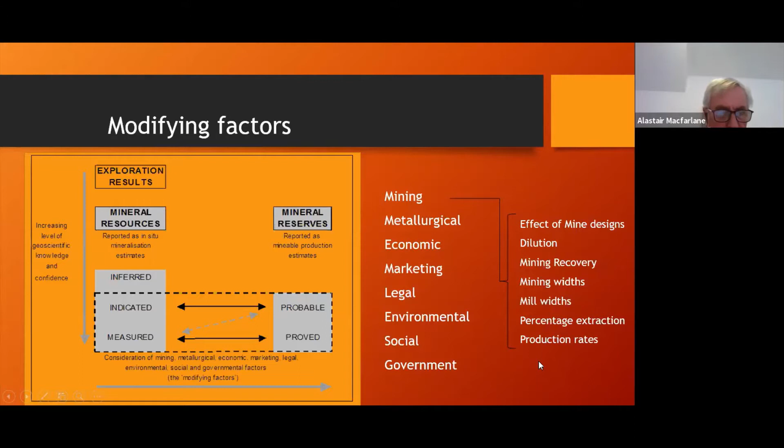From a survey point of view, we go back to looking at our different widths, typically in our tabular mining environment, where stoping talks to us about channel widths, which is the width of the reef we're looking at, then our stoping width, our broken width of what we actually take out, converted then into a tramming width with the addition of fall of ground material, and also ore pass scaling and that sort of thing, through to a hoisting width, and finally to a milling width. So we'll have some increase from a channel width of 50 centimeters, perhaps up to 180 centimeters on milling width, when we bring in all of this dilution that occurs along the process.

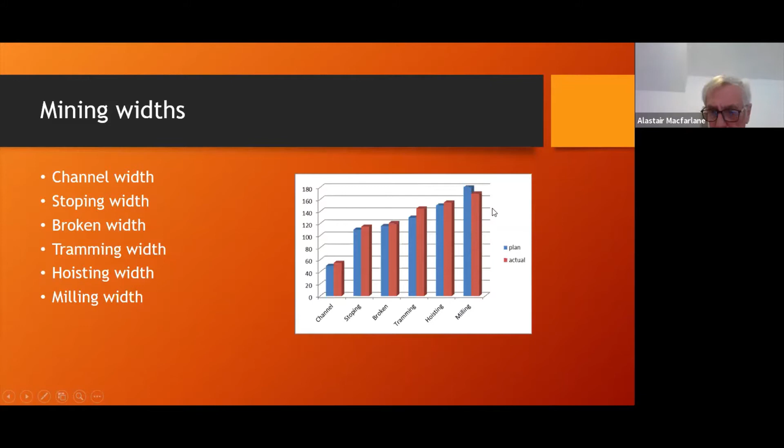We'll be looking at that as a plan and an actual, and in survey terms, the difference between the plan and the actual would be a discrepancy, either positive or negative discrepancy. In this case, a negative discrepancy.

So dilution is contamination of ore with barren waste wall rock, typically, or it may be contamination of ore with material below the cutoff grade. Therefore, we need to know where the cutoff grade is in order to classify that material either as ore or as waste. Or as marginal material. It could also be contamination of ore with recovery reducing minerals, especially in the base metal environment, or even in the PGM environment, where excess chrome could be reducing our downstream recoveries.

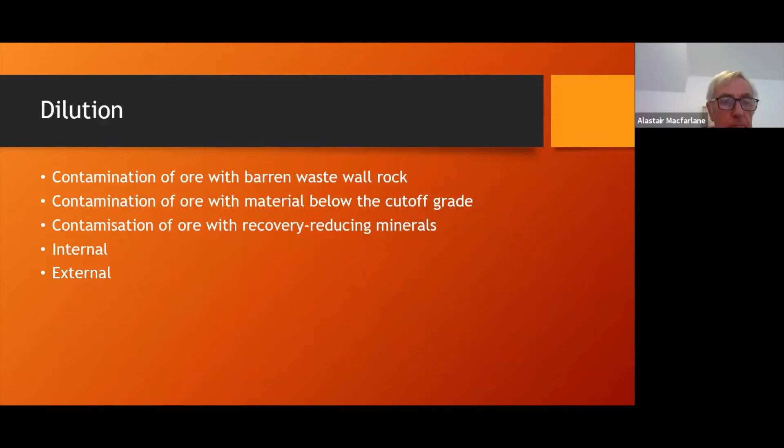Although we may be able to separate it out and sell it as a saleable product, if it's reducing recovery downstream, then it's diluting material. And dilution can be internal or external.

So here are some definitions. Dilution is the tons of waste compared to the tons of ore. Sometimes you see it expressed as tons of waste compared to tons of ore plus waste, but that's not correct, because that tends to underestimate the dilution. So it's a percentage of units of dilution compared to units of ore. Primary dilution is inherent in the mining method selected, whereas secondary is dilution incurred beyond the planned stope dimensions. So total dilution is primary plus secondary.

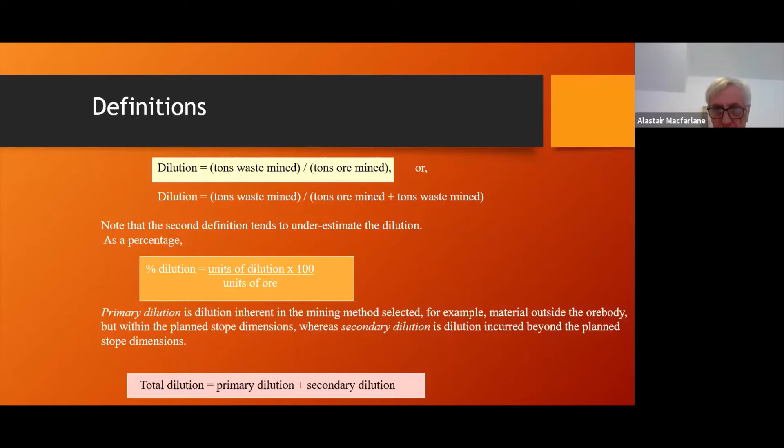Starting off with a tabular environment, if we have a look at potential dilution that's coming in through mining, through fault losses, dikes and faults, bringing in overbreak, things like that, off reef down here, how much we're pulling in from in-stope excavations.

There's an interesting question down there: what is the effect on mine call factor? There was one operation that I looked at fairly recently that had a pretty poor mine call factor, and it was quite clear in that particular case, because of an extremely high propensity of this kind of thing, that the main cause of the mine call factor there was underestimation of this kind of off-reef contamination in the ore flow. But that's only for that particular operation.

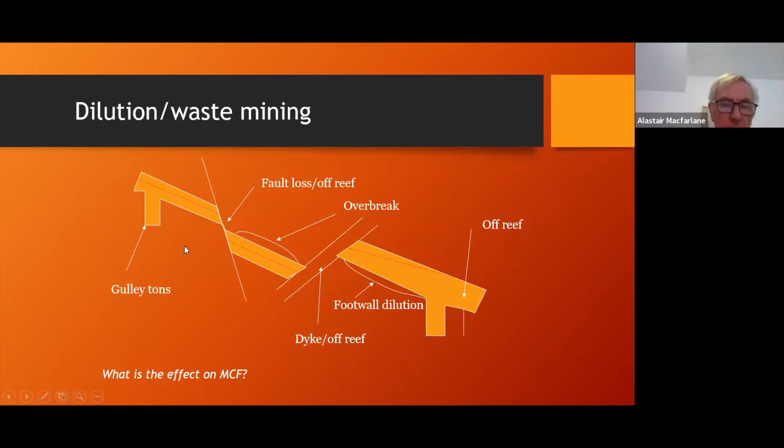We also looked at others where the opposite was true, where we found that the amount of dilution from this kind of thing was already accounted for. So it's really a case-by-case situation.

Again, in a tabular environment, we have planned stope dimensions for a channel width and a mining width to accommodate people to go in there to drill and blast. Obviously we want that to be minimal, but we may get unplanned footwall dilution here, especially where we've got soft footwall, where we may be pulling out things like Booysens shale in the footwall. We may have damage to the hanging wall, bringing in waste from the hanging wall beyond the planned dimension, maybe a bit of underbreak over here, and then internal dilution as well, which would relate to split reef.

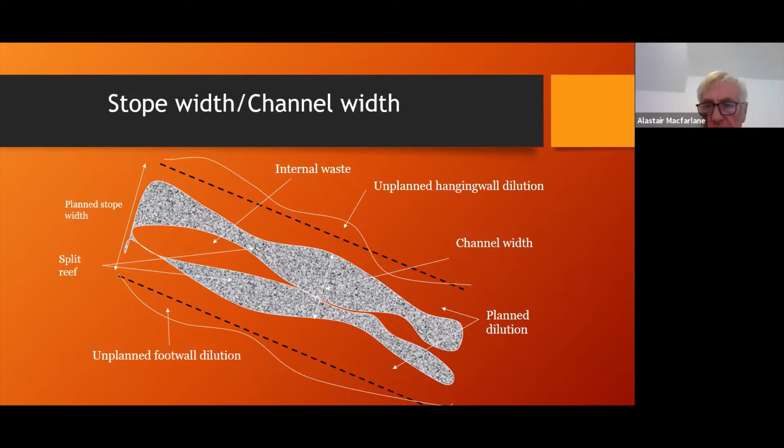I'm aware of a couple of operations at the moment that are battling with split reef, where this material is causing significant dilution, and attempts are made to do things like waste packing and separation. But from a more advanced technology point of view, one could be looking at things like ore sorting technologies, which have advanced quite well in recent years.

So dilution sources in tabular mining during stoping will typically come from overcharging, over drilling, inaccurate drilling, good old-fashioned stuff that we've tried over many years to overcome with better explosives, with also drill rigs and other kind of technology that can help us there. Falls of ground, impacts of seismicity, scaling in ore passes and other excavations, and cross-tramming.

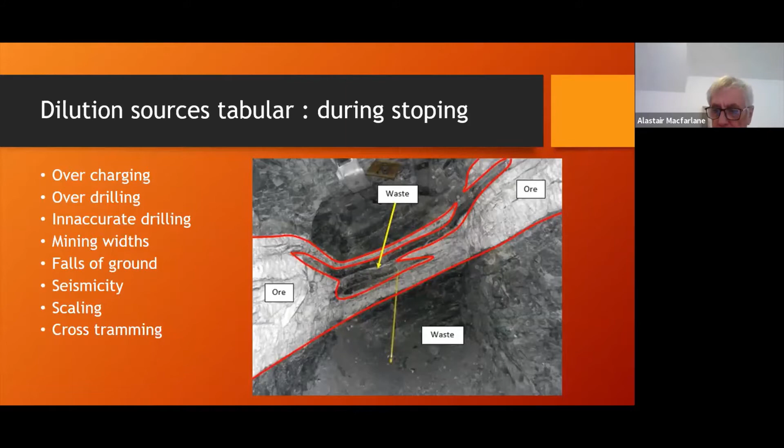Then after stoping, stope hanging wall failure, like we see here, where there's our channel width or our reef or our planned stope width. This is a typical backbreak situation in a PGM environment, where all this material, which is falling down there, will either result in abandoning of the ore that's underneath it, or pulling out very significant dilution. So we can get ore loss as a result.

Maybe ore pass failure occurs as well. Watch out for belt changeovers, because we may get waste being hoisted or put into the plant, or vice versa, reef going on the waste dump. Main ore pass scaling in deep operations, and surface cross-tramming as well. So these are just some of the impacts that we'll get.

So fractal analysis and survey measurements should be able to provide calibration for us for these forms of dilution. Accurate measurement and data capture and data analysis is more possible these days, and we need to utilize it in order to calibrate our ore body to be able to put the right factors into our planning.

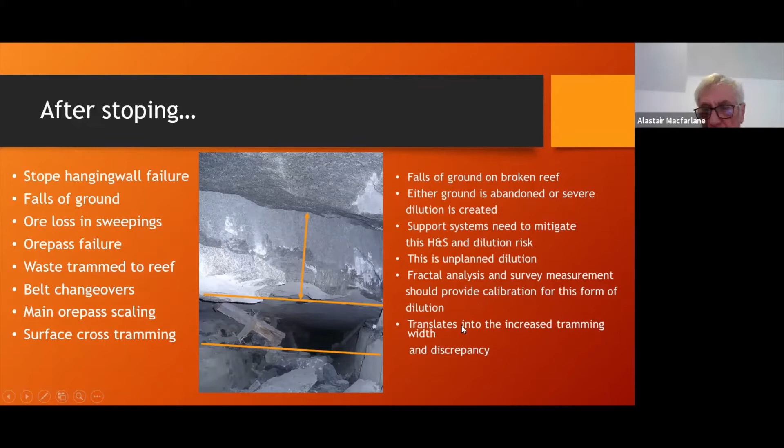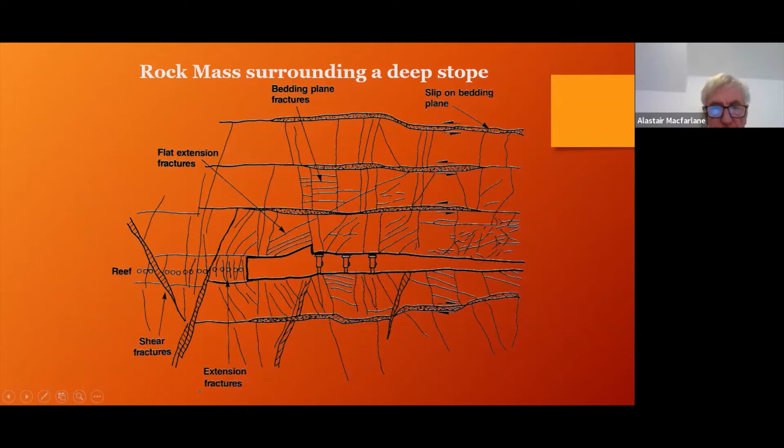Typically in that environment, very highly fractured ground can result in a lot of dilution coming out that is unplanned from our planning model. So let's move away from there into massive stopes.

Starting with sub-level open stoping, we can get dilution coming in from sidewall failure if the dimension outside our planned stope is into waste. We could get sloughage happening on both sides. From blasting, we can get damage caused there, drawing in waste by over-drilling, vibration and overcharging.

We might have internal dilution such as this reporting down to the draw point, because in this kind of environment we cannot be selective, so whatever is in there is going to come and report through to the draw point.

We also get time-dependent failure here. If we're mining this kind of stope on a retreat, time-dependent failure will also result in sloughing of sidewall reporting to the draw point where we may still be drawing.

Poor sampling can also impact this if we don't understand well enough where our ore boundaries are, along with over-drilling, inaccurate drilling, overcharging of large blasts creating vibration, and poor geological and geotechnical models, the accuracy of which depends on the quality of the delineation drilling we are doing underground.

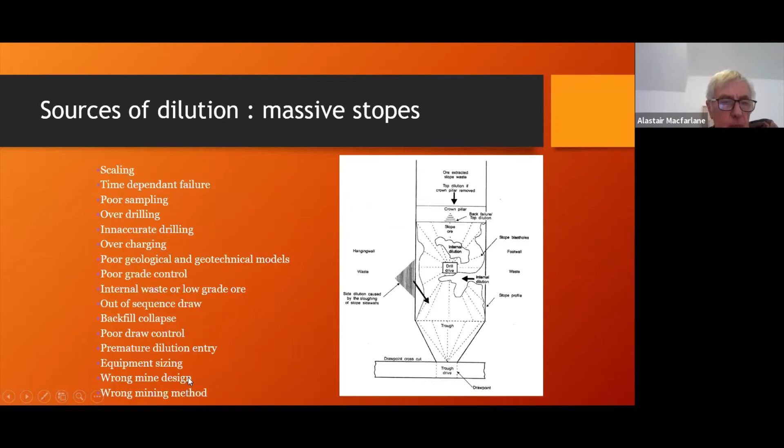Sometimes equipment sizing is an issue, looking at equipment that is too big, where we have to make larger excavations to accommodate the machine. That is not good, and maybe the wrong mine design and wrong mining method altogether.

Clearly on the drilling side of things, this is more prevalent in narrower ore bodies. If we're looking at the copper belt, typically in Zambian operations, the larger operations there would have been mining very large ore bodies where dilution is not a significant issue.

Whereas the narrower the ore body becomes, as has been the case with a number of newer operations up there, dilution becomes much more critical, because 10% dilution at the edge of stopes on a 150 meter wide ore body is fairly insignificant. But if the ore body comes down to a 5 meter width, 10% dilution on that becomes highly significant.

And this would be exacerbated if the ore body boundaries are irregular like this, and we're getting blast vibration. We have weak sidewalls here, a hanging wall and footwall, then we have over-drilling. We can get more and more dilution reporting down to the draw point.

The one particular example we were looking at was about a 4 meter wide ore body with ring drilling like this. The ore itself, as well as the sidewalls, were weak to the extent that after drilling the holes, sometimes the holes were closing up because of the highly fractured nature of the ground before we could get the explosives in. It was a different challenge.

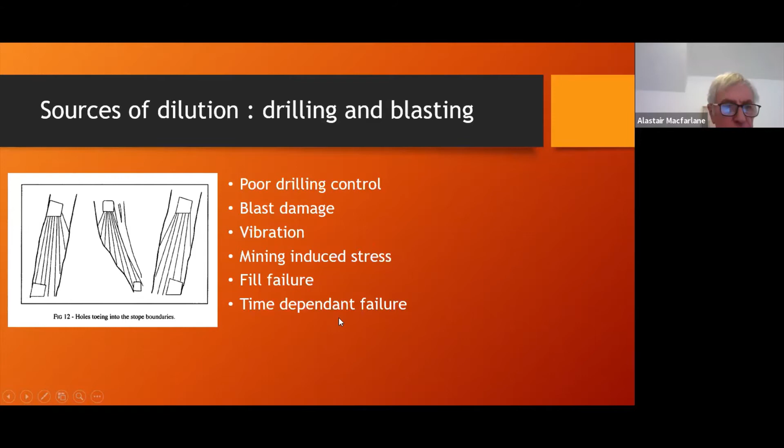We could be getting dilution in terms of mining-induced stress and fill failure, like I said before, and the time-dependent failure effect also. So here we are, thin ore body, vertical ore body in an open stope. That's our planned ore to come out there, and you can see here you've had severe sloughing happening on both hanging wall and footwall, probably resulting in a good 100% dilution if you just look at the dimensions there.

And this is time-dependent failure. This will all report down to the draw point and cause dilution. So we need to get the broken ore out as quickly as possible before this time-dependent failure happens.

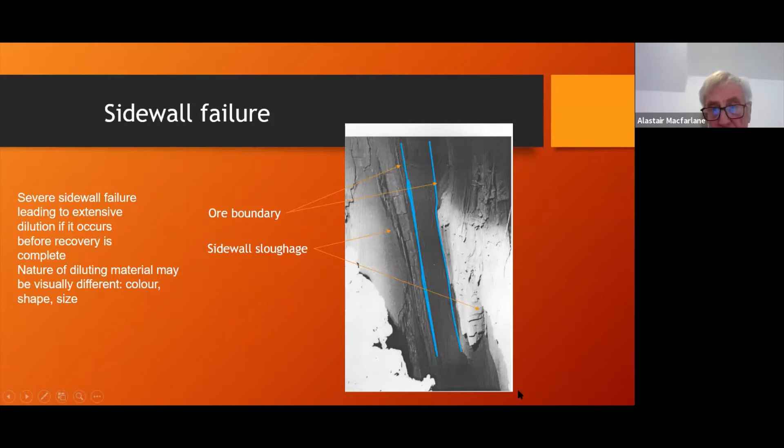When it does report, you would see here the material that we are blasting, if our blast pattern is right. Apart from the different coloration of ore compared to waste, the fragmentation is different in terms of what's reporting down there. So this kind of sloughage, when it reports to the draw point, ought to be quite clear to the operators or supervisors. But if you're chasing tons, they may be blind to that.

Here's a very complex ore body we had a look at, where they had a severe problem with mine call factor. On this particular sub-level, you can see the ore body in red. This is a plan, and delineation drilling has been done to try and identify the ore boundaries. But this is extremely irregular, with massive dilution happening here.

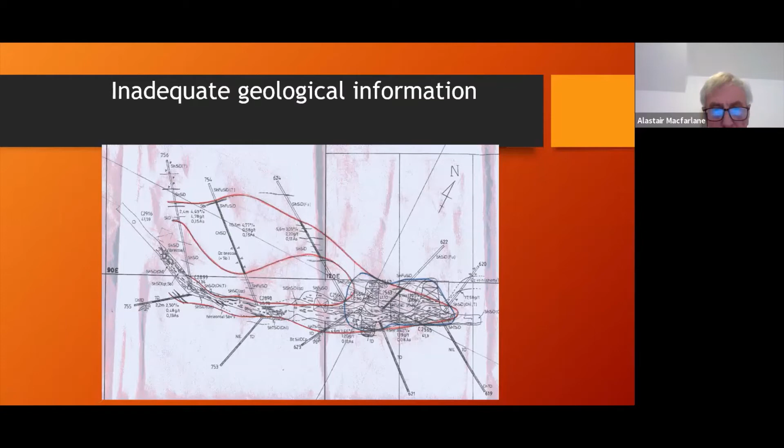To try and mitigate against that, these sub-levels in this sub-level open stoping operation were minimized to only 8 meters separation vertically, and on the subvertical, to try and overcome or minimize the effect of the extremely irregular ore body.

Here you can see an overhand layout for this ore body, and the secret here is to get the ore out before the time-dependent failure happens. In this particular case, they were not doing that - they'd gotten severely out of sequence down here. So there was massive dilution reporting to the draw points, resulting in a severe drop in recovered grade.

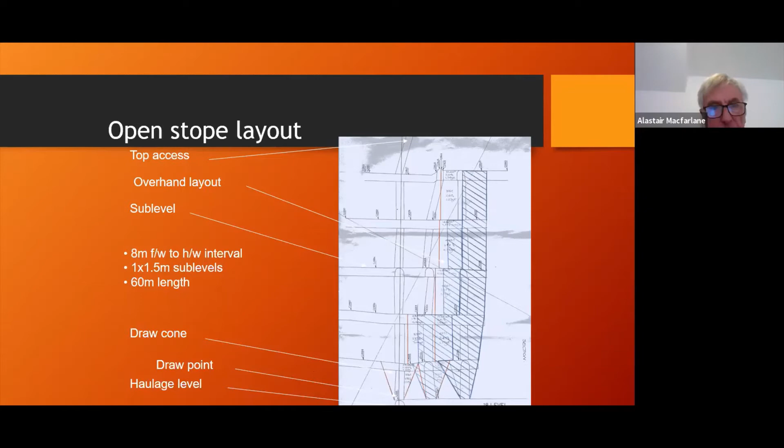So we look at the block cave situation. We are looking at either low-grade material reporting that is actually inside, because we can't be selective here at all - maybe low-grade material within the pipe, or different facies of low-grade material. Dykes and sills that may fail, like was the case at Cullinan, the Gabbro sill that was intended to stay in place but eventually failed.

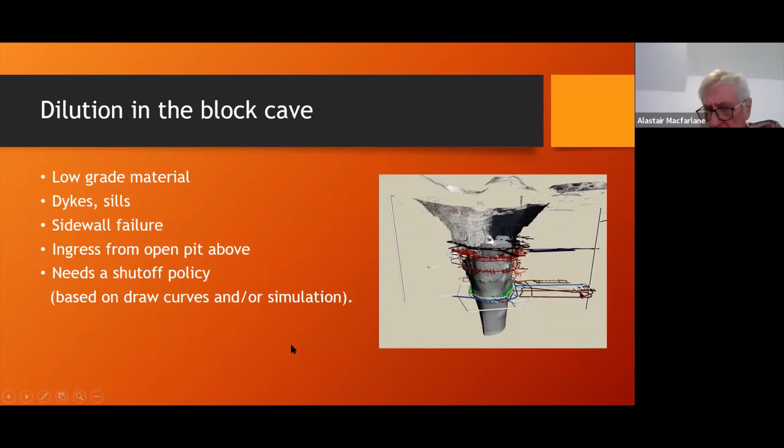Sidewall failure occurring either in the block itself, or sidewall failure from the open pit above, reporting down onto the top of the block. For this kind of thing, we need to have a shut-off grade policy at the draw points on the production level, and that needs to be based on draw curves, which we'll talk about later, or on simulation of the draw.

In the sub-level caving operation, we've got caving material. We're mining on the retreat here, uphole ring drilling, multiple sub-levels. In years gone by, typically we would have had isolated draw - working on one level, trying to pull ore out from one or two draw points or sub-levels. The result would have been pretty high rates of dilution reporting in there, maybe 20, 30, 40% dilution.

These days, what we work with is interactive draw. So we work multiple sub-levels at the same time, both in the vertical dimension and in the strike direction, so that effectively we have a moving curtain of ore all the time across multiple draw points. We also rely on the fragmentation here, because fine material runs faster than coarse material. So we blast the ore to fine portions, and we make sure we're pulling that out as quickly as possible, so it comes through before the waste reports. With multiple draw points, we have effectively a moving curtain through there.

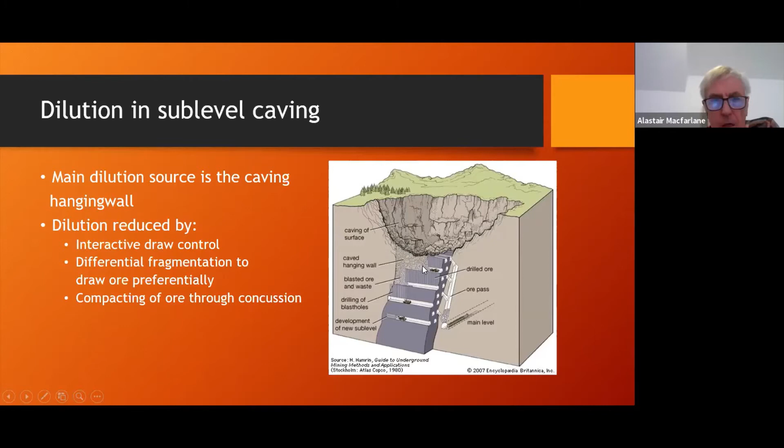In the open pit, if our ore boundary is irregular and not quite matched to our bench profiles, then that will draw in dilution.

We may, of course, as well have internal dilution. And then we also need to look at blast movement, whether it be waste, which can cause spillover on our benches onto our ore floors, or movement of the ore itself. So we need to be able to model that, and that we can do.

We can put in markers to check out on that ore movement as well, so that we had an original dig plan, which was looking something like that. By the time we blasted, the ore has moved, and we can go back and recalibrate that dig plan in order to make sure that we're going to get minimum dilution and minimum ore loss once we start loading.

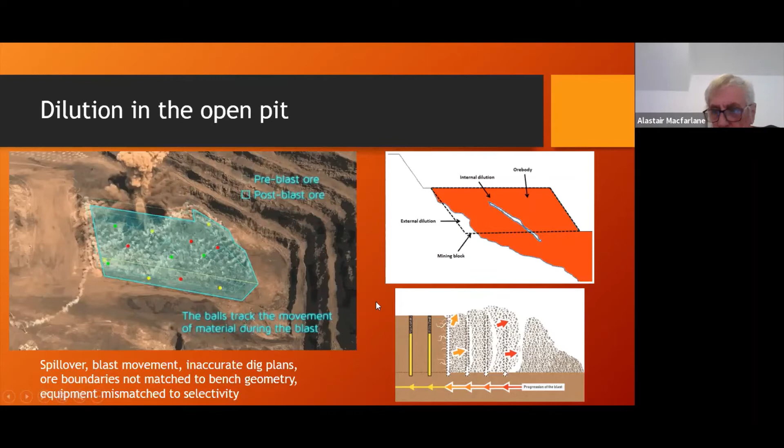Also, we need to look at selectivity. It's important to say if we want to increase selectivity, for example cutting those benches into half size for better control on dilution, then you've got to ask the question: is the equipment we've got matched to the level of selectivity we want to apply? That often precludes you from doing that, because you don't want to replace your whole fleet. There's a bit of a trade-off involved there.

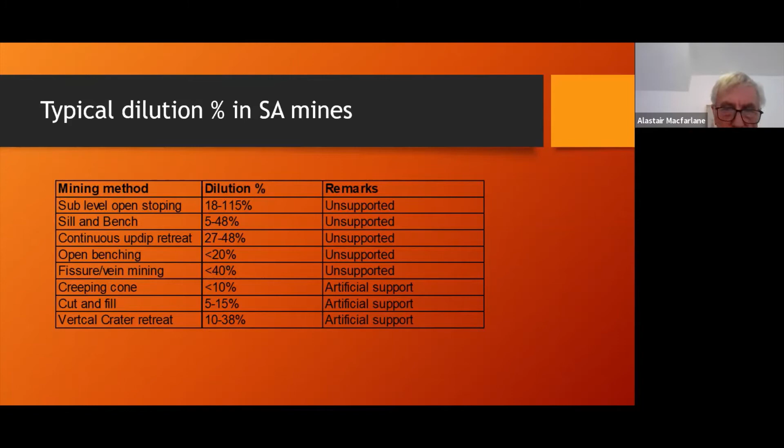Here are some typical percentages of dilution for different mining methods in South African mines, between unsupported methods like sub-level open stoping and benching, compared to where artificial support is used, specifically applied for dilution control, like in cut and fill operations. Here are some international comparisons that have been done. Sub-level caving shows, in these cases, 10 to 30%, 10 to 15, or 20 to 25%, where these days we can reduce that below those numbers.

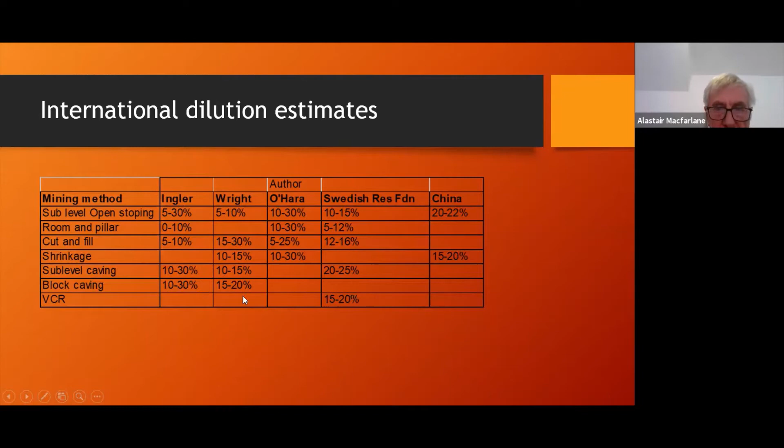This is an example from the Golden Giant gold mine in Canada, where they've done stope calibration and back analysis. Here are different stopes in a sub-level open stoping environment with backfill or post-backfill, along with the planned tons to come out of the stopes and the actual mined tons. These actual mined tons are taken from draw point tons measured, as well as cavity monitoring done afterwards. For example, this stope was planned at 60,000 tons but actually drew 104,000 tons, so a lot of hanging wall waste failure happened in that one, which came from the cavity monitoring that identified it.

On another one here, the tonnage drawn was a little more than planned, but there was 13,000 tons of backfill that came out of that draw point. So here you see the draw point dilution: 34% in one case, 70% in another. This information is useful to you.

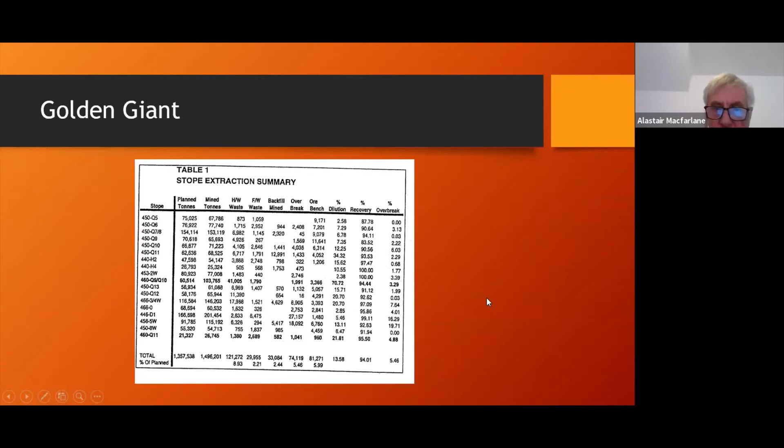It's historic, obviously, you can't change that. But depending on the geozone you're in, you can say let's redesign, because clearly something was wrong in this case with our design. Let's go back and have a look at that. Our stope dimensions must not be correct, something has changed, something has gone wrong. Let's make sure we take account of that, whether it's 20% or 34%, figure out what went wrong, and incorporate that into future designs.

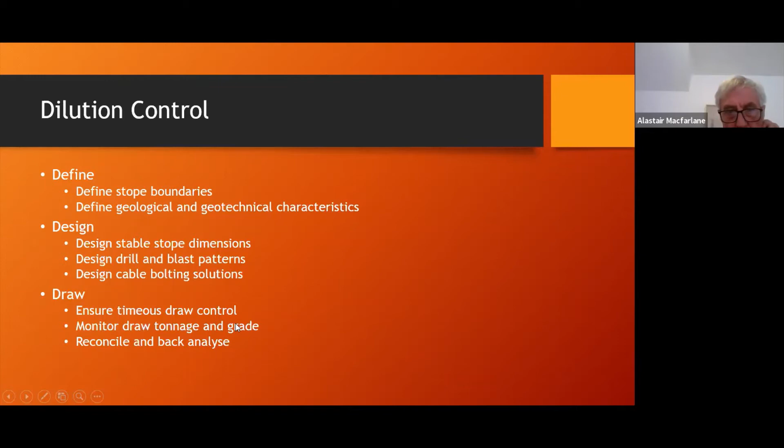So when we talk about dilution control, we talk about define, design, and draw. Defining is making sure we define our stope boundaries and our geological and geotechnical characteristics - that's all about data, modeling, and surfaces. Design is looking at designing stable stope dimensions, drill and blast patterns, cable bolting, and other support solutions. And draw is ensuring timely draw control, monitoring our draw tonnage and grade in real time, and reconciling and back analyzing all the time.

Talking about define: we've done our delineation drilling underground, and we need to make sure the data we're getting is sufficient in terms of the end point spacing of our fans of delineation drilling, so that we get good ore boundary definition to use for stope design. We need to define our data requirements - what data do we need? Obviously we want grade, but we also want structure, boundaries, and geotechnical characteristics.

These characteristics are what we use for defining mining rock mass ratings. We look at intact rock strength, rock quality designation, joint spacing, fracture frequency per meter, and joint condition, and we have ratings for each one. We can choose to use rock quality designation and joint spacing, or just use fracture frequency per meter. This comes from physical observation and measurement, and these are ratings we add together to get a rock mass rating or rock mass strength. Then we put in adjustments for weathering, orientation of the stope, induced stresses, and blasting effects to give us a mining rock mass rating, which we'll see used a little later on.

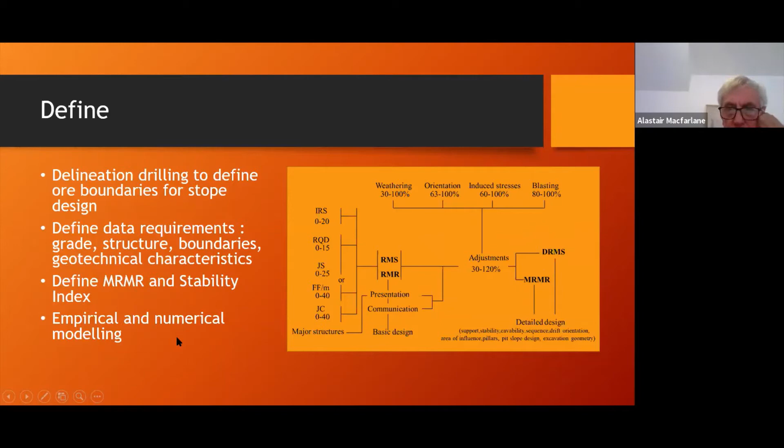So when we do stope design, first thing is mining method selection, maybe a bunch of trade-off studies we need to do, saying what are the expected dilutions that we're going to get, and depending on mining method and stope dimension, what's the level of selectivity we can apply, what's the ore loss likely to be, and obviously cost of it.

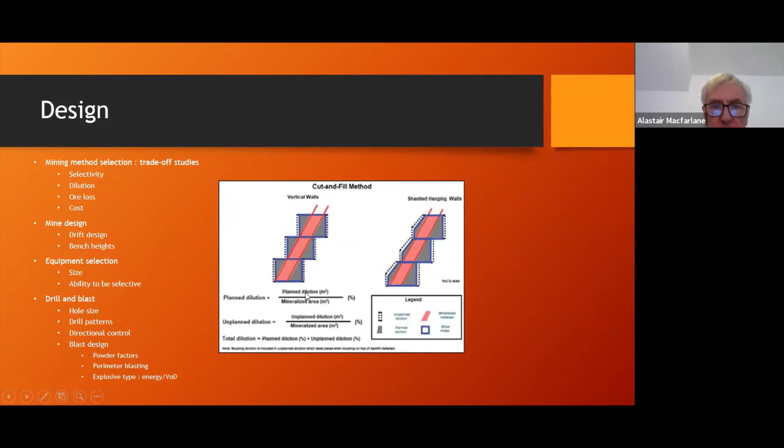Mine design, we look at our drift design and our bench heights. In this case here, we've got a comparison for cut and fill methods using standard drift development for drift and fill. And we can modify that - this is a fairly narrow ore body, so we can modify that by going to a shanty back system, modifying the shape to try and reduce the planned dilution here. Here are the outlines that we get, so that would bring in the unplanned dilution as well.

Equipment selection, we need to look at size and our ability to be selective again, and then drill and blast design for the correct hole size, powder factors, drill patterns, directional control, and our blast design in terms of whether we need perimeter blasting, explosive type, velocity of detonation, energy, etc.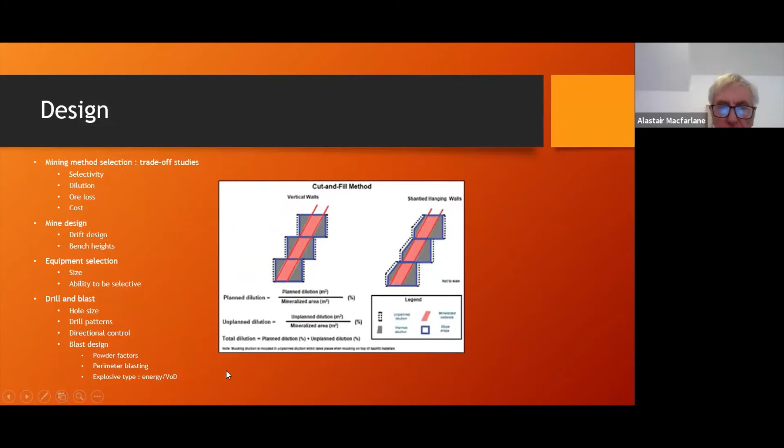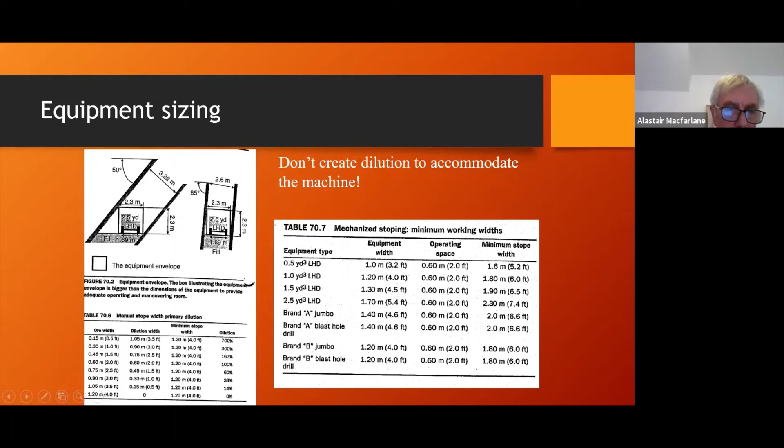Equipment sizing - what we don't want to do is create dilution to accommodate the machine. So get the right size machine to do the job and not have to make a big excavation to accommodate it. This shows for different ore widths the sort of dilution that we're going to bring in, where we've got a minimum stope width needed for the equipment. We see the dilution coming from 700% down to 0% at the bottom. Also for mechanized stoping, the minimum working widths needed for different machines - an important mining engineering consideration to get the right machines.

So we look at the modified stability graph method for dilution prediction. Rock mass rating - we looked at mining rock mass rating before. If we look at rock mass rating, Bienewski tells us this is how we can characterize or derive rock mass rating.

Where Q in this expression is the tunneling index number, and Q is defined like this. So we can calculate Q when we know these parameters that we can apply, and that Q number comes into our modified stability graph calculation, where the stability number N is modified tunneling index times 3 factors: A, B, and C - one being a stress factor, second being a joint orientation factor, and the third being a gravity factor.

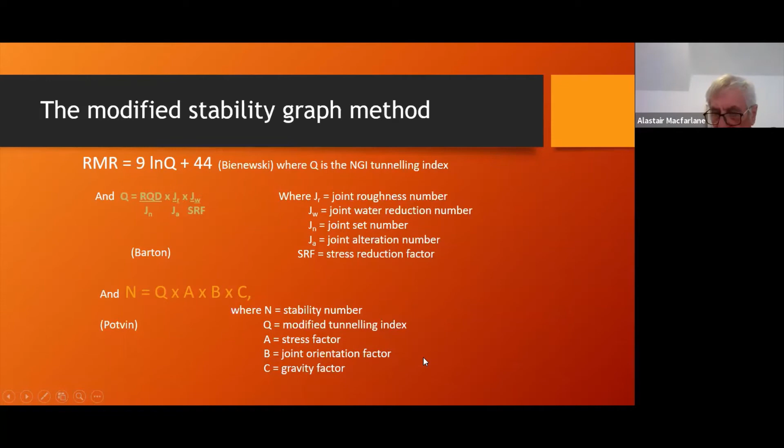And this was developed by Yves Potvin. It comes through into this, where we say here, the modified stability graph, here it is. Primarily, we would use it for defining whether, in terms of designing a stope in a massive mining environment, or any other environment for that matter, is it going to be stable or is it going to be caving?

So we look at this parameter here called hydraulic radius and stability index, where we've calculated it this way. Hydraulic radius is a term used in hydraulics and is a number derived by dividing the area of the excavation in question, whether it be the hanging wall or the plan area, by the perimeter for that particular surface. With that combination, we can see where we plot for a given hydraulic radius.

So what can we change? Well, we can't change the stability index because it is what it is. But the hydraulic radius, we can change - by changing the dimensions and shape of the excavation or the stope surface. So if we want to go into a caving environment, we can modify by moving this way. If we want to go into a stable environment, we go in that direction by changing the shape and plotting up here. So we can do that for basic differentiation, and there's a transition zone in the middle as well.

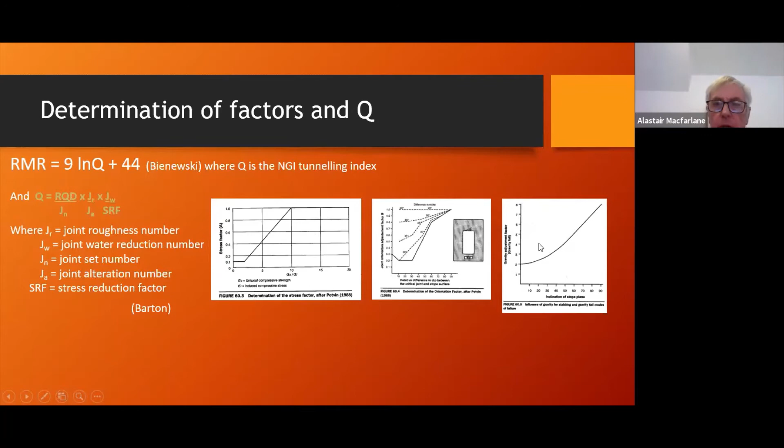And that means that sort of dimension, so we'll look at that in another graph. Before we look at that, here's again what we looked at just now. But here are the three factors: the A factor, the stress factor, the B factor, which is the orientation factor, and the inclination of the stope plane factor over here. So we just read those off from these calibration graphs.

So when we talk equivalent linear sloughage, or equivalent linear overbreak or slough, it is equivalent linear overbreak compared to slough, volume of slough from the stope surface compared to the stope height times the wall strike length. So in reality, the kind of sloughage we'll get will have a profile like that. But what this is doing is it is converting that into a linear dimension across that stope surface.

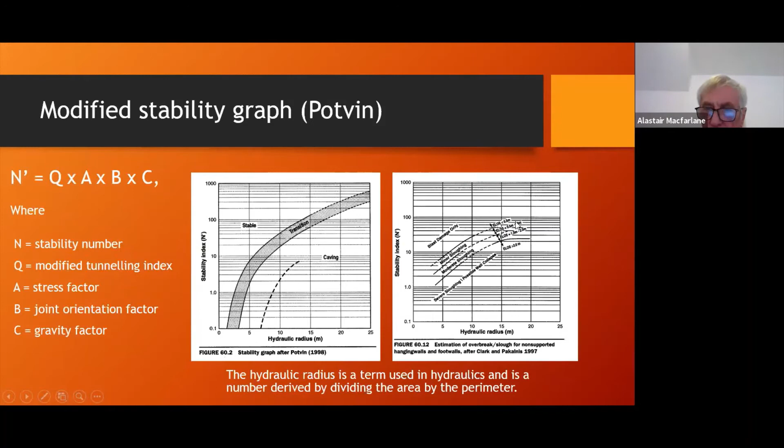And so going back to the graph, that tells us what it's likely to be. Maybe we're in this zone, so saying we're going to get half a meter to a meter of sloughage across that stope surface, and that we can then convert into a dilution percentage, given our stope design.

We can look at this to say, well, let's try and tie this up so that if this is the hanging wall, we want to reduce the amount of dilution coming in, then we can tie it up by putting in cable bolts, a cable bolt pattern, which means we'll have to put in those hanging wall drifts to be able to do that, obviously all at a cost.

And we can have a look here to say, knowing these numbers about rock quality designation and joints and hydraulic radius, we can define for a particular combination of those factors for our ore body or our stope, whichever condition we want, what is the cable bolt density that we require over here. And that's end spacing in terms of cables per square meter. So we can define that pattern for our stope for stability.

As I said, obviously it comes at a cost. So there's a trade-off here. Is it worth doing all of that? Or do we tolerate the dilution? Or do we go to a different mining method? So those are cost-benefit trade-offs that we need to do.

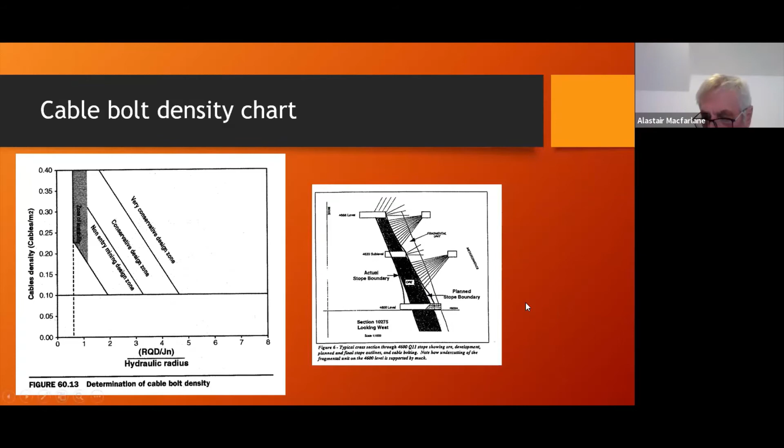When we talk draw, we're going to talk about dilution curves. Here's a dilution curve, courtesy of SRK. So here's the composition of our ore body over here, up to 100%. And here is the material drawn that we're getting at the draw point.

So if we said we're planning 100,000 tons to come out of there, then because that's the tonnage in the block that we're looking at, we would say at 100% draw, this is the point where I'm at, let's use this middle curve. Then I would say what I'm drawing out at that point when I'm at 100%, what is still coming out is 30% ore. So I'm not going to shut off there because I'm going to leave a whole lot of ore behind if I shut off at 100%. So I'm going to draw more than 100%, and I use the calibration curve to do that for me.

And I can actually convert that into grade, and I can use that for grade control as well as dilution control. So I can say I actually want to go to 120% draw because that's where I hit the cutoff grade over there, because I've converted it into a cutoff grade at when I'm drawing 20%. 20% of what's coming out is ore. The remaining 80% is now waste.

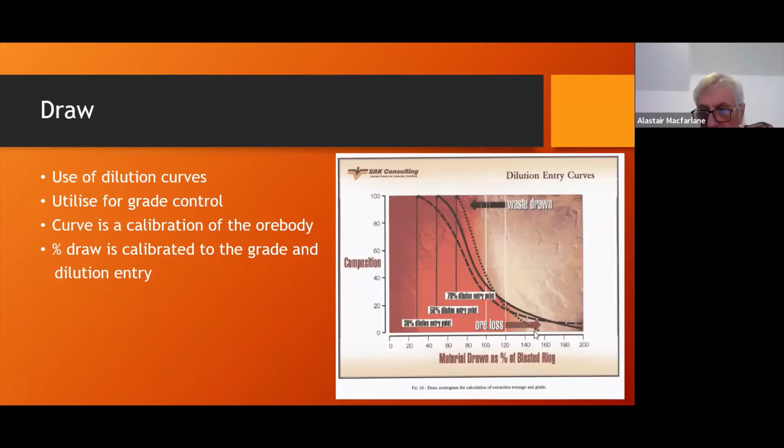When that material's coming down to the draw point, the diluting material may report prematurely if the draw sequence is compromised or if diluting material is finer. It will come down faster and report to the draw point. The diluting material may be visible. The shut-off decision should be taken on the dilution curves or simulations that we're doing. Grade control at the sample points is pretty unreliable, especially if you're getting this kind of stuff coming out at the draw point.

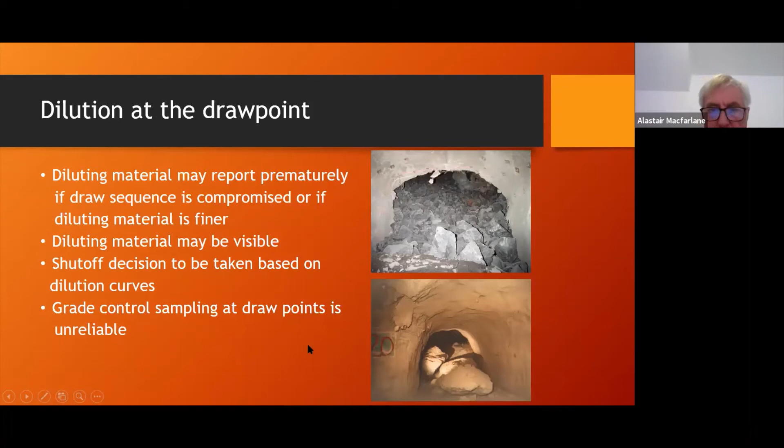So where we're looking at draw, it comes back to the principle of either isolated draw at draw points or interactive draw zones. If we have isolated draw defined by the spacings of the draw points, the size of the draw points and the height of interaction, then what we may get is columns of ore left in the middle that don't report to the draw point, and we get rapid drawdown through the draw ellipse.

And if we've got waste material above here and it's fine, like it would be from the bottom of the open pit, there's a lot of silt and stuff like that, it will race down through and report quickly to the draw point, and we leave ore behind.

Over here, if it's ideal, we get interactive draw. And we're drawing all of these draw points in the right sequence and simultaneously, so effectively we have a curtain of waste that's lying at the top and is moving down at the same rate as we're drawing, so we don't get the premature waste reporting down here.

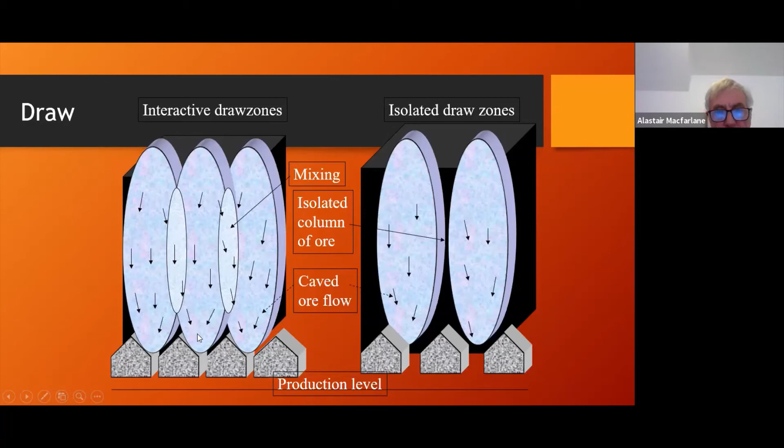If, however, that zone of interaction is too big because we've put these draw points too close together, then we will funnel or rat hole that waste rapidly down through here, and it will report in both directions at the draw points. That's shown here, again, courtesy of De Beers.

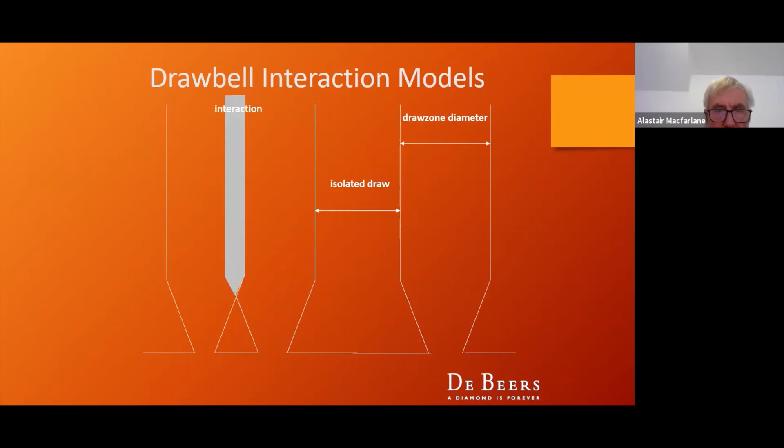Important interactive parameters are the draw zone diameter. We need to know what the interaction is that we need, and the spacings to avoid isolated draw. So we have to put our draw points closer together so that we get the correct level of interaction happening.

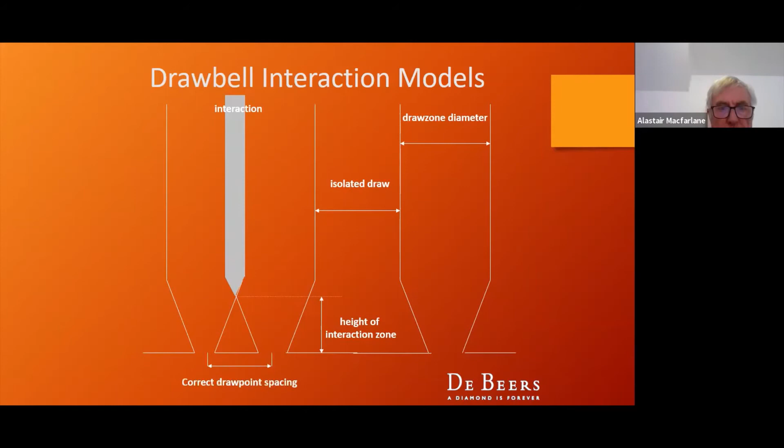Another parameter we need to know is the height of the interaction zone, in order to get the correct draw point spacing to minimize dilution.

And here it is, after another example. We may get ore loss and weight down onto pillars between draw points, which could cause geotechnical problems and draw point failure. And over here, as I said before, too much interaction, and we get dilution reporting very quickly and displacing ore at the draw points.

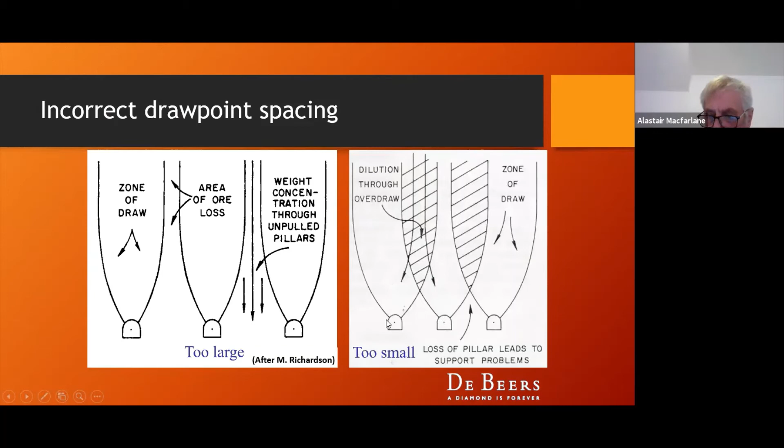We can do a lot of simulation on this sort of thing. As I said, fine material will tend to move down faster, so if that's diluting material, it'll get there faster than the ore. Isolated draw encourages early dilution entry, and we can use empirical design or simulation to define optimal layouts.

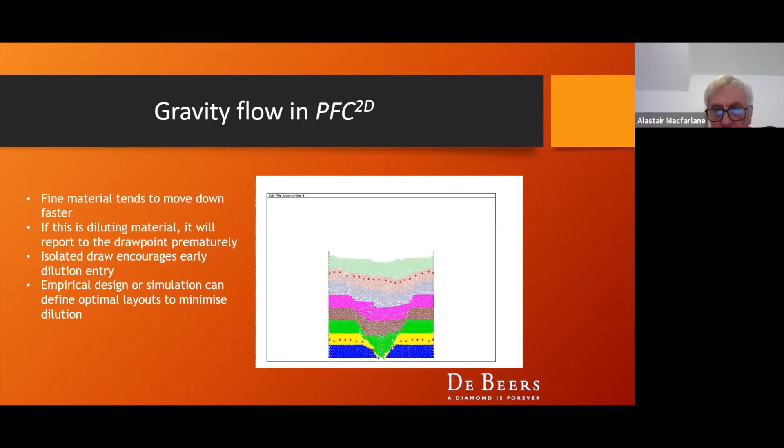This is just looking at a single draw point, but we could obviously simulate multiple draw points. And we've got markers in there that show us, if the waste is on top, how quickly that waste is going to report down to the draw point. And we could simulate that for interactive draw as well.

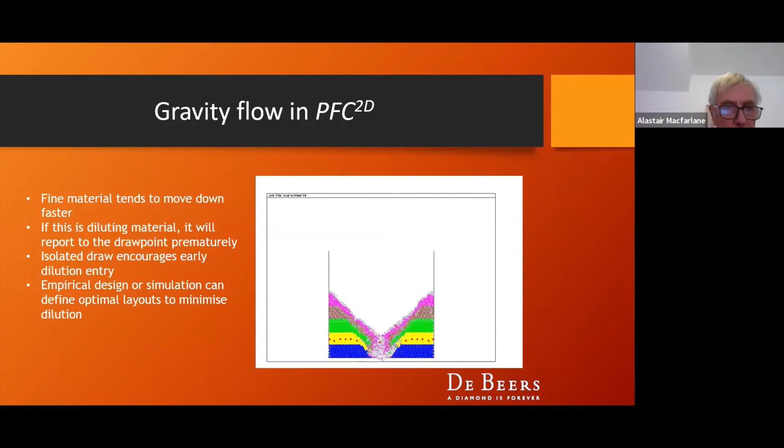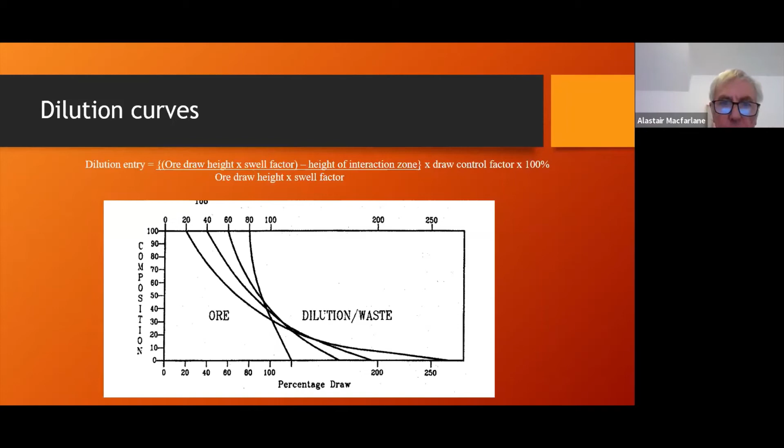As I said, trade-off studies: cut and fill is a higher cost method, but it allows higher selectivity. You can drop the lower grade stuff down into the fill if you want. That relies on a lot of sampling though.

In stope, sub-level open stoping is lower cost but less selective. Cut and fill is designed to reduce dilution in poor mining rock mass rating, hanging wall and footwall conditions. But the cost of the fill and the cyclicity of the operation must offset the higher dilution that you would otherwise get in the sub-level open stope.

Sub-level open stopes can be designed for stability based on mining rock mass rating and hydraulic radius and the stability graph. And of course, for future stopes, you can change the stope designs if you're starting to get higher dilution entry as you go into different geotechnical and mineralized zones.

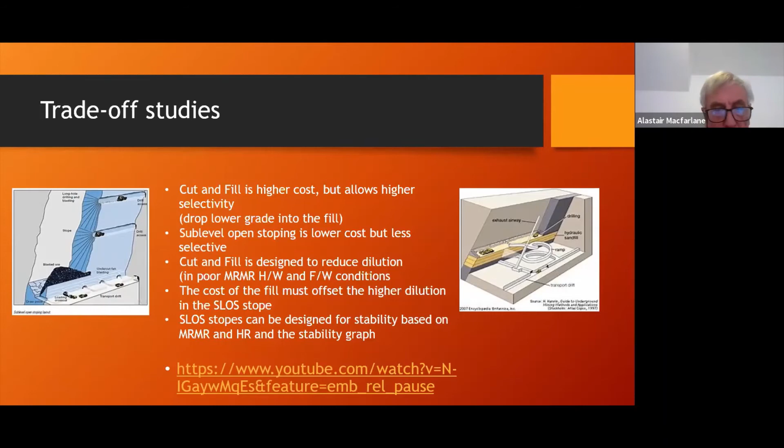Other principles on dilution control would be: try and expose weak walls progressively. Look at your drilling accuracy and shock and vibration minimization. Utilize cable bolting if it's cost effective. Consider pillar designs and look at your extraction sequences.

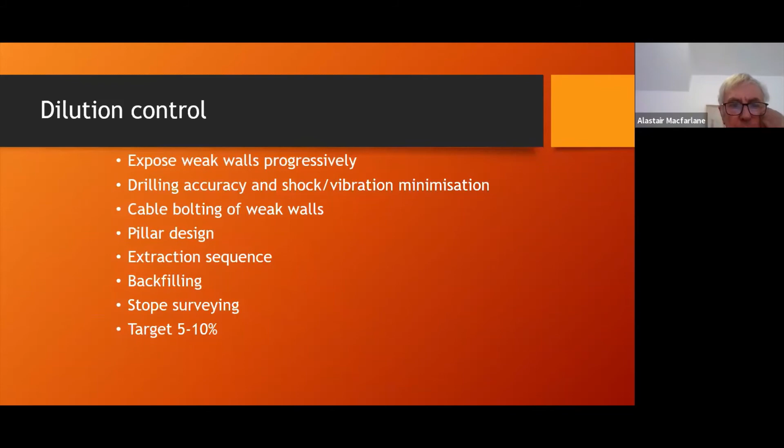Backfilling, stope surveying, cavity monitoring systems to bring yourself down to a target of about 5 to 10%.

What are the effects of dilution? What does it do? Firstly, it messes around your reserve block estimates. If your block estimates are assuming a particular dilution because it's a modifying factor, and you're in fact getting a whole lot more, then your reserve statements are wrong. It skews numbers and results in over-evaluation. It disguises real problems because you might be measuring tonnage and thinking everything's okay, but then you look at your grade and you realize something is not okay.

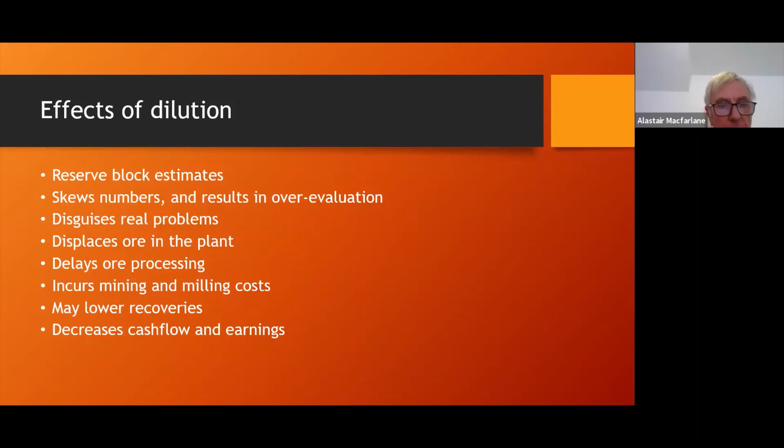It displaces ore in the plant, which is a time value of money issue. It delays ore processing, and it incurs all the full mining and milling costs. And it maybe lowers your recoveries as well, because you're going to have more material reporting out to the slimes dam, and every ton of material that goes out there carries some value with it. And it decreases your cash flow and earnings.

The effect on the cutoff grade - we've got a grade tonnage curve. Increased dilution increases the unit cost of metal production. That will increase your cutoff grade and move this line up, and as a result, your available resource or reserve is reduced. This reduces your payable ore reserve available, and increased dilution decreases the recovered grade. This further increases the cutoff grade. And if this happens unknowingly, then waste is being misclassified as ore.

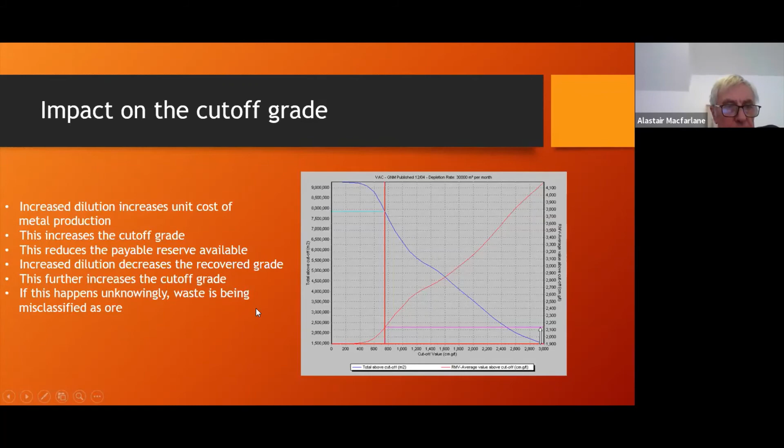If you have a graded deposit, the principle of marginal costing and marginal extraction is quite important, because in an example like this one, if this is your primary ore source, M1, M2 is a secondary source, and both of those are economic - you want to take them out - and you've got M3 as well, which you want to take out. That material grades further into the hanging wall, and so where this may be your original planned stope boundary, you would classify that as waste because it's below your break-even cutoff grade. If you look at an in-stope cutoff grade for a massive mining operation like this, you can actually carry on mining up to there on a marginal cost basis because you paid for all the excavation already with this material. So you could move forward there.

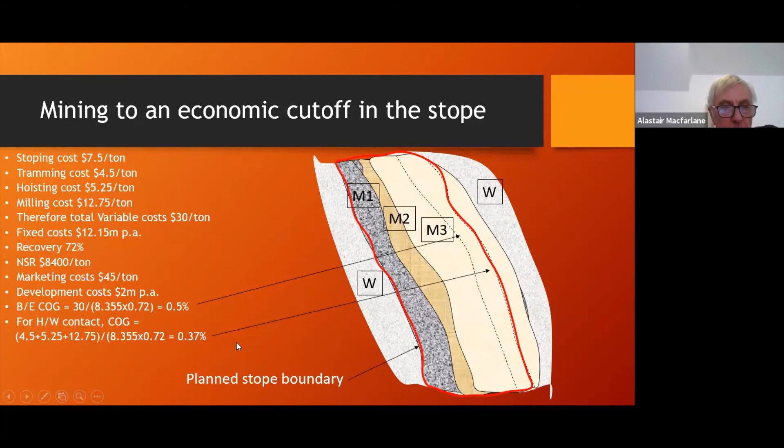So instead of classifying that as waste, it's marginal ore that can come out with this as well, and you can drop down to a lower cutoff grade and still be payable.

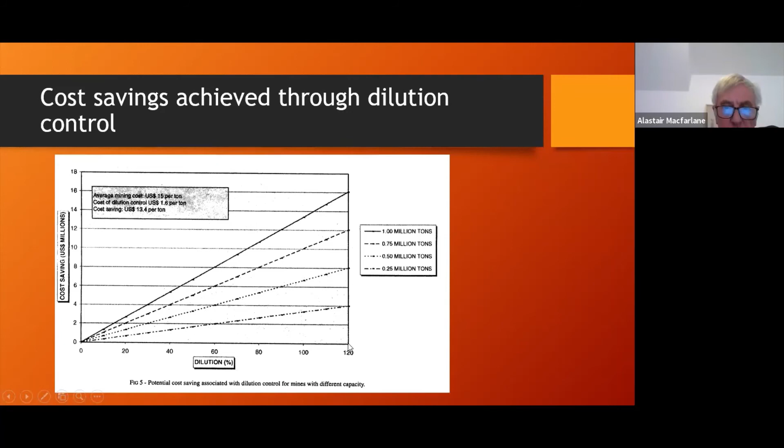This looks at cost savings achieved through dilution control - each graph represents a different capacity. And what you're seeing here is that if you take this line, let's take this line here, 500,000 ton capacity operation, this just shows the cost reduction or cost saving that you can achieve as you move down from 100% dilution down to zero. Quite significant.

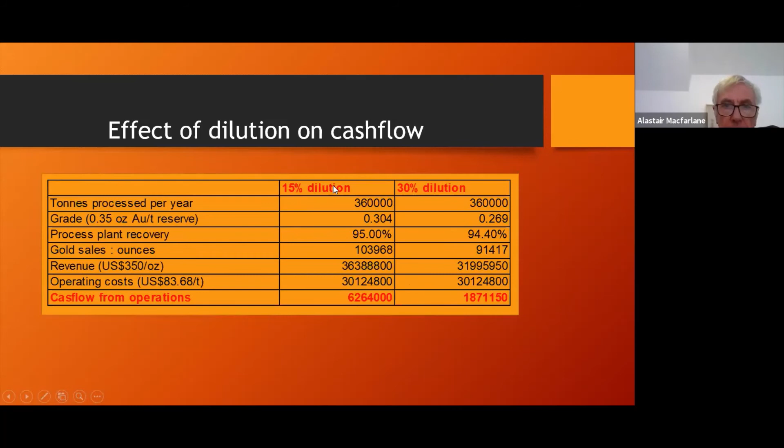And this one I did on a simple model, just saying 15% dilution compared to 30, just on cash flow. What do we get? Grade - drop in grade, obviously recovered. Process plant - slight reduction in process plant recovery. These are your ounces, your revenues, resulting in a two-thirds drop in cash flow annually in going from a 15% dilution to a 30% dilution.

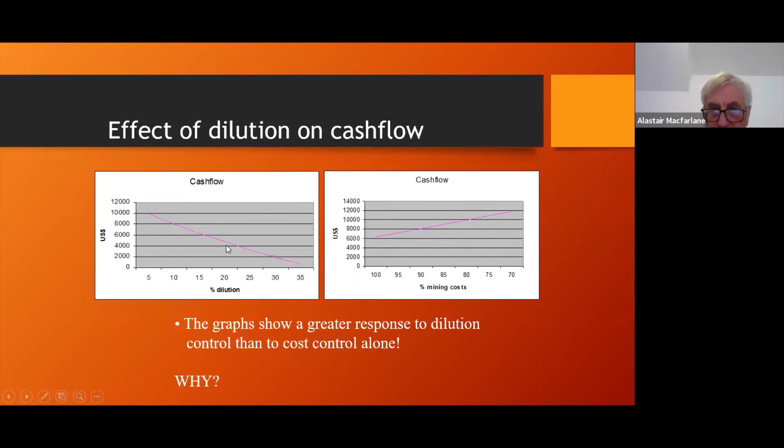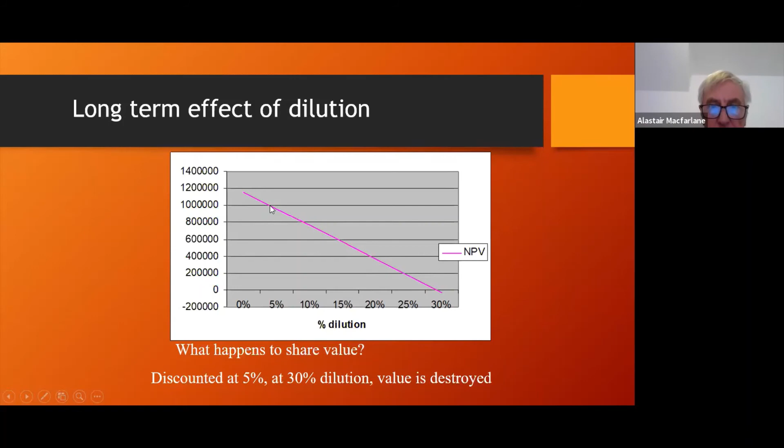This is a long-term effect on a model that I had, that I ran, looking at impact on NPVs with increasing dilution. So when you get to 30% dilution on this, which was a gold mine model, you get to zero NPV at 30% dilution. I kind of don't believe this model - it's a little bit too simplistic because there are multiple factors impacted by dilution. So I don't think it should be a straight line. I think it should be more exaggerated than that.

So for measuring dilution, we can look at tonnage measurement compared to plan, and grade at the measuring points in the ore flow to the model. That means we have to have the correct grade measuring technologies in place, and we need to apply ore flow management and reconciliation in real time.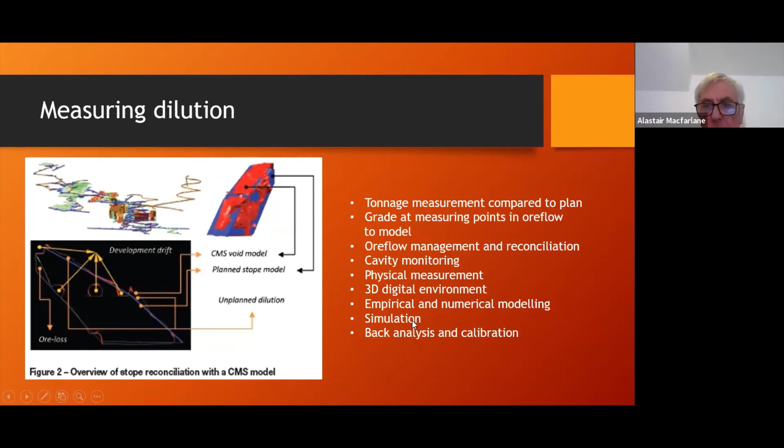Whatever measuring systems we've got need to give us real-time information linked to our cavity monitoring system, so we can do full reconciliation, linked to physical measurement, looking at this all in a 3D real-time digital environment so we can take decisions on the fly where we see something going wrong. We can do empirical and numerical modeling, simulation, back analysis, and constant calibration.

When we look at constraints, dilution creates higher volumes at lower grades. Where constraints exist, either in the mine, processing, or market, lower grade ore is fed through the constraint for longer. This reduces NPV and cash flow, and the opportunity is to reduce the dilution, thereby optimizing through the constraint. Alternatively, remove the constraint, which is a cost-benefit decision—in other words, improve the quality flowing through the constraint and your ore flow.

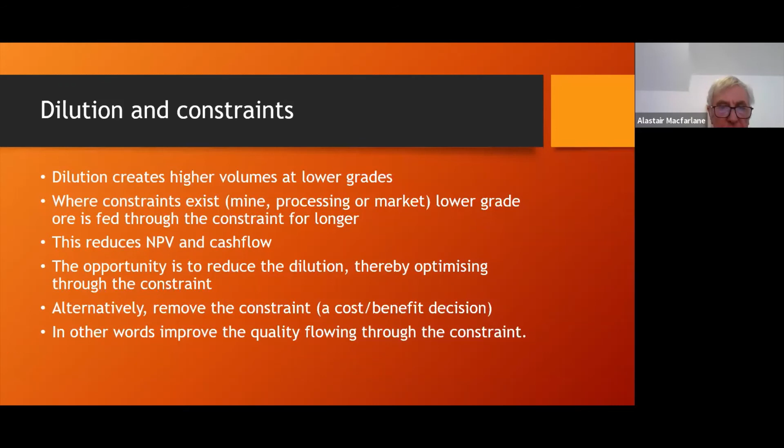We can look at a simple cause and effect. The effects of dilution are poor conditions, overbreak, bad ground, increased widths, increased tons, lower grades, resulting in poor recoveries, loss of capacity, increased costs of mining, poor safety, lower product per annum, and delayed ore to the plant. Those two affect our NPV and our cash flow, so we get loss of shareholder or stakeholder value.

And we look at causes that can be poor designs, wrong methods, poor blasting, poor process control—things based on poor information, not enough real-time data, maybe poor training and skills. And at the end of the day, blame ourselves—poor management resulting in that.

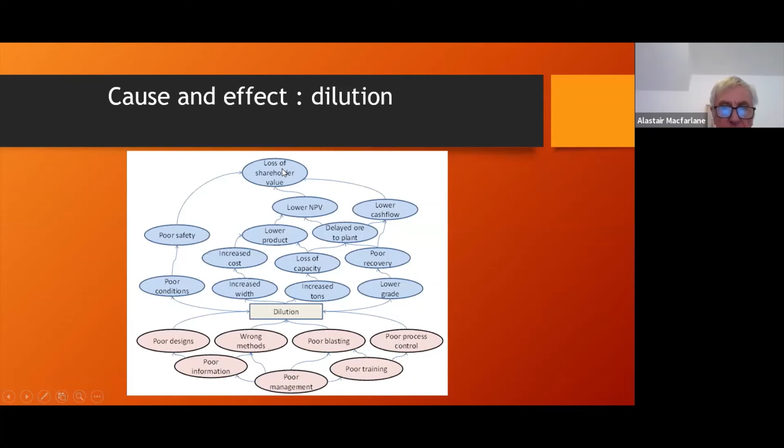Okay, so that is it. Thank you very much, everybody. We can open for any questions.